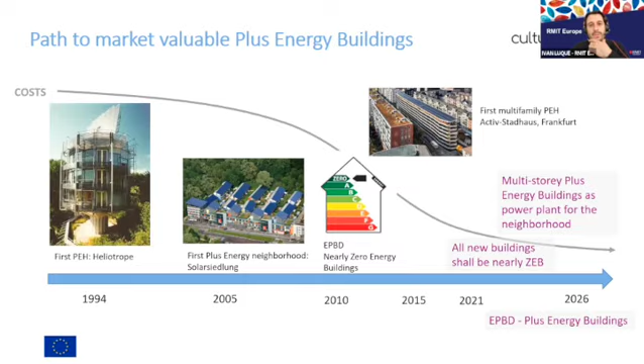So starting with the first slides on the definition of the positive energy building from the perspective of Cultural-E. These three aspects are key for us. One is the reduction of the greenhouse gas emissions in the system surrounding the building, but also incorporating neighborhood and district scale, as the positive energy building intends to support the flexibility concept by reducing the stress in the energy grid and allowing the exchange between the different buildings. All this may help the transition to a zero energy state and a cost-efficient approach.

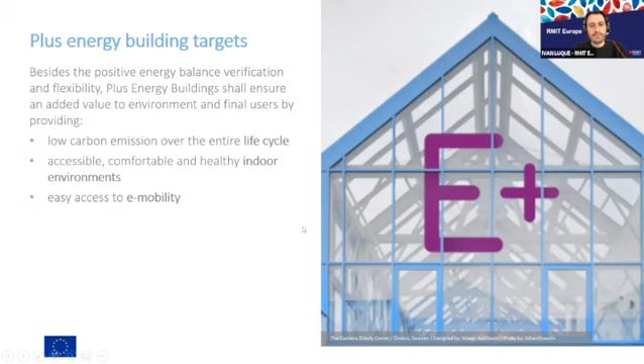As well, plus energy building targets focus on the life cycle, the indoor environment, and e-mobility, meaning that we aim to reach low carbon emissions, to make the indoor environment accessible, comfortable, and healthy, and allow the building features to incorporate easy access to e-mobility.

The overall objective of the project is to define viable and testable technology concepts and business cases for positive energy buildings by accounting for a climate and cultural approach that encompasses the overall building configurations, technology, and user and system interaction. Cultural-E is developing a set of solutions that will be comprehensive and easily replicable, thanks to reliable methods and practical guidelines that are going to be developed during the project, thanks to the demonstrations in the 4 climates.

As key expected impacts that the project will bring after the 5 years of implementation, we expect to support the nearly zero energy building concept and go forward from this by taking into account cost efficiency and keeping similar costs in comparison to nearly zero energy buildings, as well as to contribute to the reduction of CO2 emissions in the residential sector by 2050, by 80% compared to the levels in 1990.

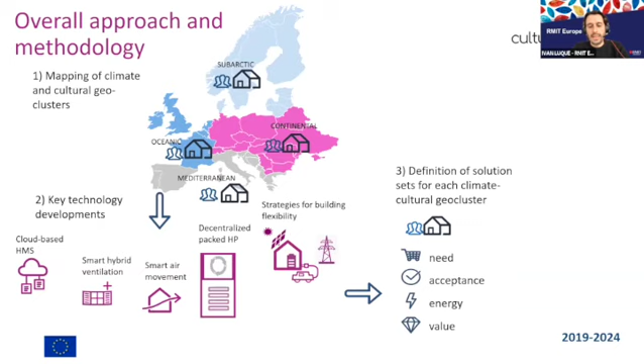And the definition of the solution sets for each geocluster will be led thanks to the mapping exercises and the technology developments that will be incorporated into the 4 demo cases in the 4 climates. In the next slide, I will go deeper on these 4 demos, with the final scope of decarbonizing the European building stock and increasing the share of plus energy houses.

which is slightly similar to the Italian one in that it will be a multi-storey building with only residential uses expected. The difference between these 2 is that the first one is dedicated to social housing, and the second one is in the free market. Then the cluster of users will be different in each one.

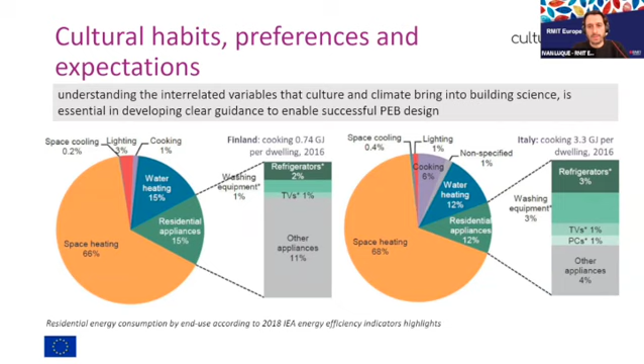For instance, cooking is quite significant. The difference is from 1% to 6%, but others also show minor changes that need to be accounted for, as the energy produced is limited, and this limitation needs to be transferred to the practices that users do in their daily life.

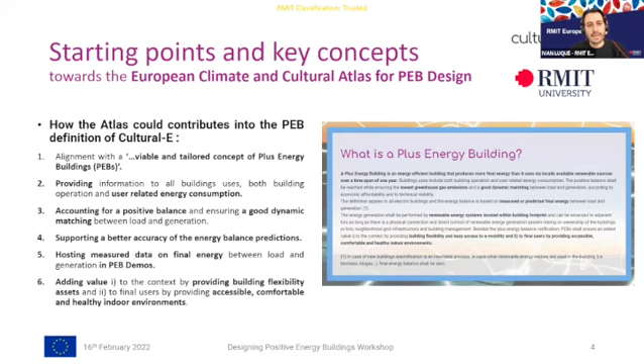In addition, it will provide value to users by providing an accessible, comfortable, and healthy indoor environmental concept for being incorporated into the design.

Initially, the Atlas was based on the first studies we ran in the project, focused on social sciences, and we delivered the first deliverables into the work package related to cultural and climate variables referring to these approaches, which has driven the current configuration of the Atlas.

But this has been complemented with further investigations developed in the first 2 years of the project, and now we can pose the following two questions that somehow give an answer to the conflicts that have arisen between the different approaches.

How to tackle user energy demand by integrating its complexity into PEB design? We know that user behavior predictions and simulation-aided building design could conflict with the energy demand concept from a social sciences perspective, because the consciousness of users and individual behavior is driven by socio-cultural factors that potentially will not be captured from the data monitor and time use schedules used for predictions.

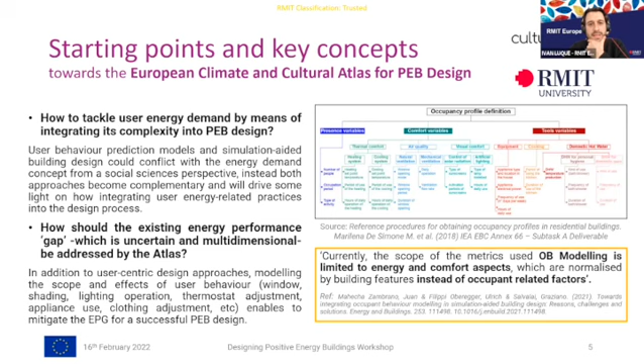Instead, both approaches become complementary and may shed light on the integration of user and energy related practices into design, aiming to transfer the sociocultural and climatic factors that directly affect building energy performance into the Atlas. Specific layers have been designed, and I'm just mentioning here the last 3 developments.

These refer to the energy cultures drivers that describe users' energy practices, intensity and consumption value variables, as well as technology selection and so on, in order to tackle the social sciences approaches.

This is complemented with occupant behavior models that bring and source a huge number of publications and scientific papers referring to modeling occupant behavior for different actions and presence scope. It's also complemented through the indoor environmental quality aspect layer group, which brings operative temperature estimations for the different climates, that Lorenza is going to be presenting later on.

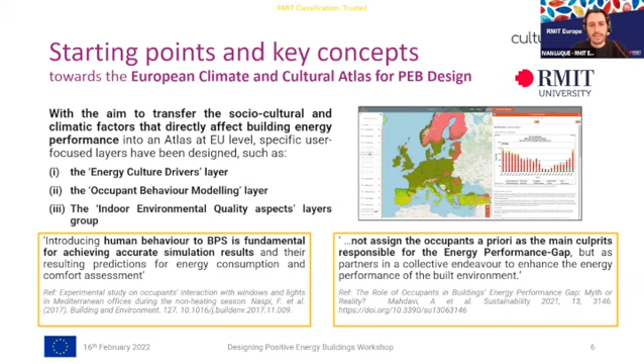And this is the approach that we are trying to pursue in Cultural-E. So, passing through the main features and the main concepts that define the Atlas.

We intend that the Atlas is perceived as a comprehensive set of information sources which add questions and provide key inputs into building designers' daily practices. It's backed up by a GIS online interface that makes available the results from the Cultural-E project and other external sources that complement and support the process.

This is divided into two main groups of layers. The first one is statistical data referring to energy, socioeconomic, climatic, and environmental aspects, most of them provided in a numerical format.

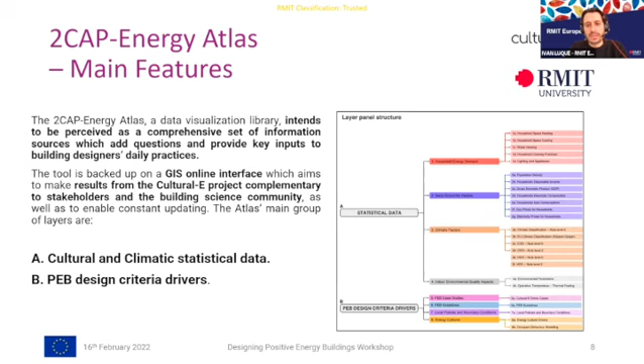And the PEB design criteria drivers group, group the different layers that have a more text and conceptual approach together with graphics. So we bring PEB case studies, guidelines, also local policies and boundary conditions, and the energy culture group.

This is the kind of information that can be reached and is sourced throughout the energy cultures layer group, where we have schedules and charts regarding windows opening, the distribution of user activities in different journeys and locations, different attitudes of users regarding lighting, shading, or clothing, as well as the thermal preferences for operative temperatures and interaction with thermostats and so on.

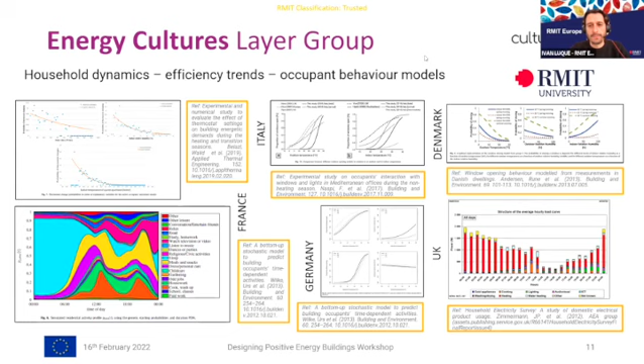So now we are going to explore the atlas. This is going to be just a few minutes before I give room to Juan for his presentation. So we have, up to now, 8 different groups of layers.

The first one refers to household energy demand, which provides information for different uses: space heating, space cooling, water heating, cooking and lighting, and appliances, distributed at national level and NUTS 2, and the sort of information that is provided allows... just one second, let me turn this on.

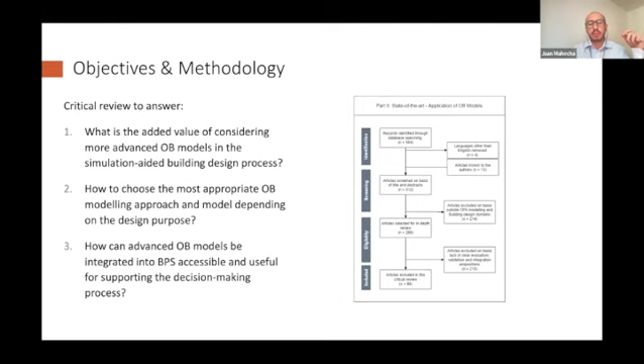Because of this, we reviewed the literature asking: what is the added value of considering more advanced occupant behavior models? How can I choose the appropriate occupant behavior modeling approach, and how can this be integrated?

So let's start talking a little bit about the occupant behavior research field that goes around the human building interaction research loop, where we have a first stage of investigation. Here we are using data collection and monitoring campaigns to gather information about the occupants, their features, characteristics, and how they interact with the building.

So here we advance also in sensing technologies, privacy and ethics issues. And then with this information, we move to another stage, understanding, when we actually implement analytical and modeling methods in order to understand the occupant behavior—which are the drivers motivating the occupant behavior, and which are the differences of these drivers in different contexts.

Then we understand also that occupant behavior is influenced not only by environmental and time-related issues, but also contextual, physiological, psychological, social, cultural factors. So it's a really complex phenomenon with so many things behind it.

And then we can classify occupant behavior into presence, when the people are or are not in the building, adaptive behavior that is intended to adapt the indoor environment—for example, I'm feeling hot, then I open a window—or non-adaptive behaviors that are more related to the kind of activities that users are performing in a building.

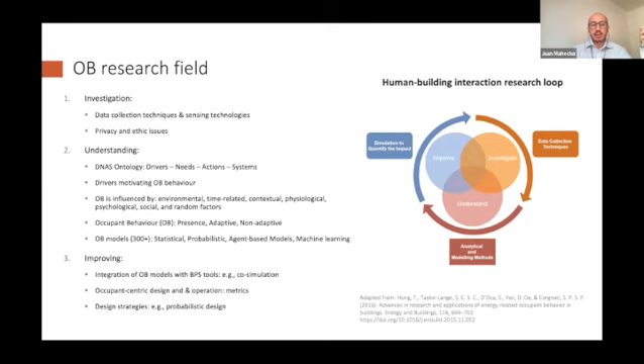For example, watching television. And nowadays we have more than 300 models published in the literature, from statistical, probabilistic, to agent-based models. With these models, we can start improving our building performance simulations, integrating the models with tools such as co-simulation, implementing occupant-centric design and operation, and implementing different design strategies such as probabilistic design.

Then one of the first milestones of our paper is: let's map what is the research roadmap between the occupant behavior research field and the actual users of building performance simulations and these models.

Because nowadays these models are mainly used by researchers and the developers of the models, but the practitioners and people actually trying to apply the models into building performance simulation is quite limited.

So we identify a first fundamental knowledge area where we are advancing a lot, but we still need more standardized protocols and guidelines for conducting and documenting monitoring campaigns, for developing and documenting models, better validation procedures, and on the simulation front, occupant-centric metrics, exploring different design methodologies, and demonstrating this in real scenarios.

Then with this, we can move to an integrated knowledge, where if we have all these aspects clear, then we can understand better the scalability and transferability of occupant behavior models from one context to another, guidelines for model selection, and the different hierarchy of actions of the different models in a simulation scenario. And then we would need supporting tools, like building performance simulation software that integrates the occupant behavior models.

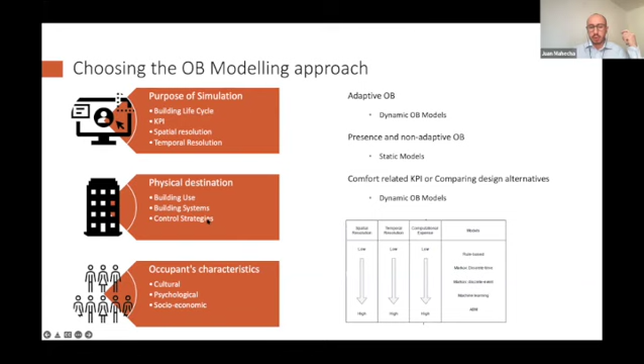If you are assessing the annual energy consumption, then maybe you don't need a high complexity model, but you can keep to a low complexity model. The same with the physical destination, so which is the building use, what are the building systems and the control strategies? If it's a passively ventilated building or has an active HVAC system, all these things are going to affect the choice of the occupant behavior model and the modeling approach.

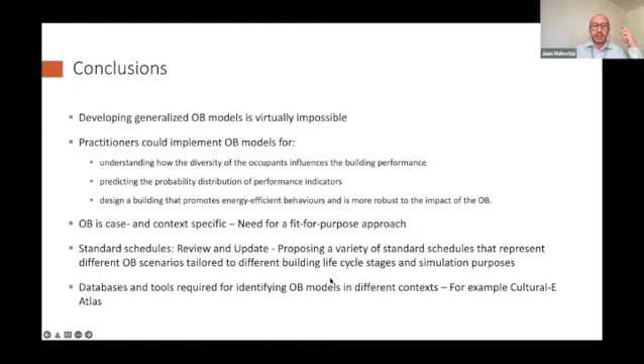So some main conclusions: developing a generalized occupant behavior model is virtually impossible. This is because of the complexity of the occupant behavior. Then practitioners could implement occupant behavior models for understanding the diversity of the occupants, how they influence the building performance, assessing different design alternatives. Then we need a fit for purpose approach in order to choose this depending on the case that you are handling. And well, we need databases and tools for identifying occupant behavior models in different contexts. And because of this, it becomes highly relevant, for example, the atlas, the Cultural-E Atlas recently presented.

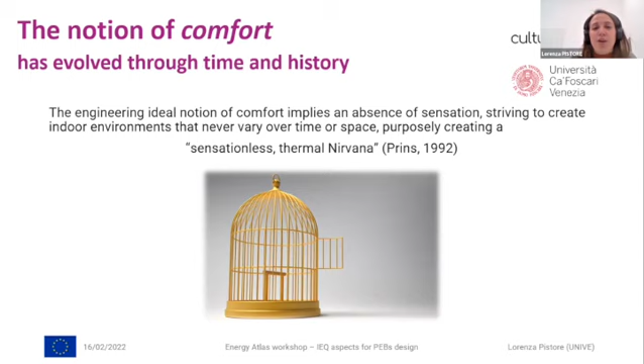We strive to create this indoor environment that never should vary over time or over space. And as Prins said, we try to create this sensationless thermal nirvana. So we usually target in the design, but also I would say in the standards, very tight and static environments where transition and stimuli are not admitted.

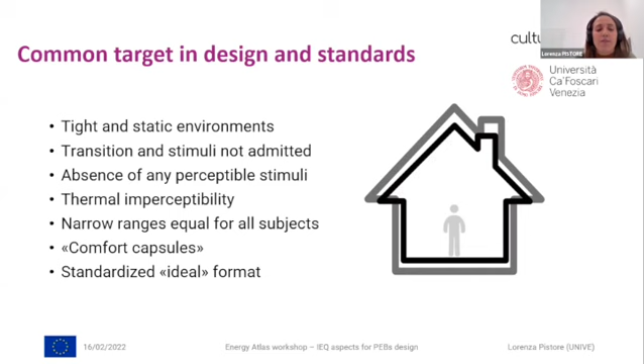We want an absence of perceptible stimuli, kind of imperceptibility of the thermal environment. The standard requires very narrow ranges, equal for all the subjects. So we try to create what in literature are called comfort capsules with this standardized, very ideal format of the indoor environment. But what we are asking in our project is: is this ideal format really ideal for the users?

Actually, if we look at literature, we can see that there is no actual increment in the satisfaction of the building occupants. And moreover, it takes more energy to maintain a very narrow indoor temperature range than a broader range. Moreover, people living in higher indoor environmental quality spaces become kind of, let me say, fussy to the thermal environment. They always have increasingly higher expectations.

And the problem with expectations is that they do not have symmetric dynamics. So it's very easy to lift the indoor environmental quality expectations of the user, but it's very difficult then to go back. And this is because we develop a kind of excessive need for comfort, an excessive need for systems and technologies. And it is also due to what in economics is called the endowment effect. Basically, once we have something, we don't want to go back.

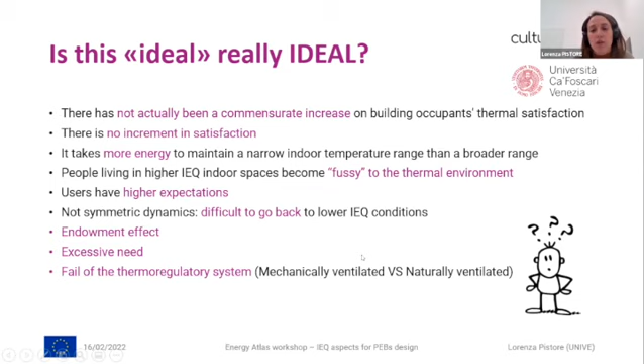And the worst part of it is that also our thermoregulatory system starts to fail in the adaptation. And there are a lot of works focusing on occupants comparing mechanically ventilated versus naturally ventilated buildings. So here I've just tried to sum up a little bit what happens. So basically we have a user with his own sensation and perception, striving to achieve comfort. So his key driver is achieving comfort.

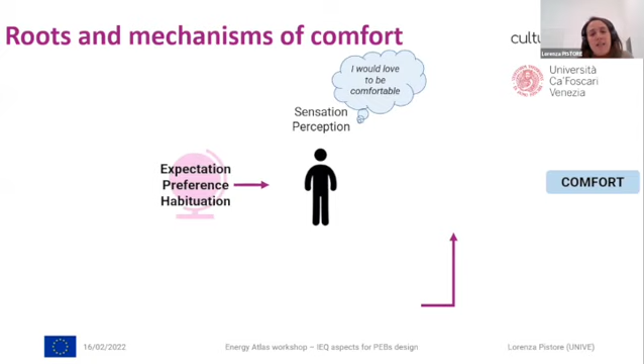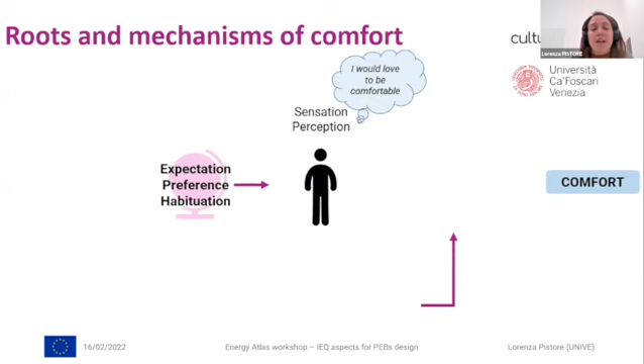But of course, the sensation and the perception of the user, as Juan was already mentioning, is affected by a lot of aspects. It is affected by his own expectation, his own preference, and his own habituation. But expectation is a very complex sum of different factors, which we could call diversity driving factors. For example, climatic long-term history of a user, cultural and social history and dynamics, demographical, historical and contextual factors, but also educational, and of course, ethnical and physical factors.

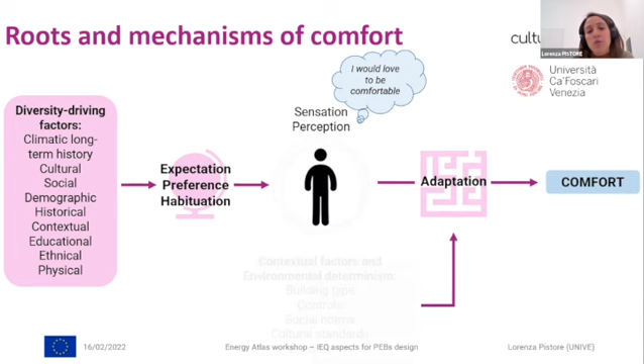In order to achieve the comfort, the user adapts. But adaptation in the indoor environment is not only a matter of the actions of the user, but again, the user is affected by contextual factors or what we could call environmental determinism. So first of all, the building typology. Let's think, for example, that we are at home and we can adapt ourselves as we like because we are in our home. But if we are at the office, we need to take into account that there are other people, everyone with his own sensation.

It depends on the controls that we can have within the environment. On the social norms: again, at home, we can stay with a t-shirt and shorts, but in the office, maybe we need to wear a suit, and so it's more difficult to adapt to the thermal environment. But also cultural standards and of course, economical conditions. So it's clear that comfort expectations and user attitudes are not a matter only of an engineering ideal of indoor environment, but account for a lot of different disciplines and sciences.

So in our project, we would like to state that the plus of the building should not just be an energy plus, but it shall be also a plus for indoor environmental quality conditions. So we needed to shift the paradigm into design, accounting for diversities in users' expectations and users' well-being. From literature, we have some hints to do so. We can try to reintegrate these external stimuli with more dynamic environments. We can readmit the air motion within the buildings and thermal gradients.

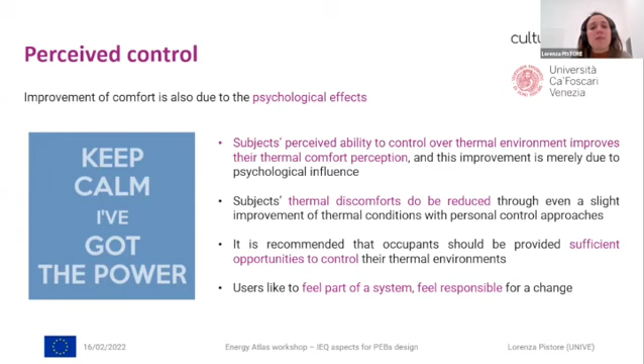And this improvement is merely due to a psychological effect. So the thermal discomfort of subjects can be reduced even through a slight improvement of thermal conditions with personal control approaches. To do so, it is recommended that occupants are provided with sufficient opportunities to control, even because they like to feel part of a system and not just be subjected to the building.

So in Cultural E, we are attempting to address diversities in the user's preferences. As we know, unfortunately, standards usually give us for the indoor environmental quality just an equal value for all the users in all the climatic and geographical areas. But in Cultural E, we're asking ourselves, could there maybe be different values for different users across Europe?

So the Smart Controls and Thermal Comfort Database is a database developed at the end of the 90s for a huge project led by Nicol and Humphreys for the development of the adaptive algorithm. So we looked at the responses of the users in these databases according to the thermal environment in 5 different countries: France, Greece, Portugal, Sweden, and UK. So we are addressing at the moment 3 climatic areas: the Mediterranean, the Oceanic, and the Subarctic.

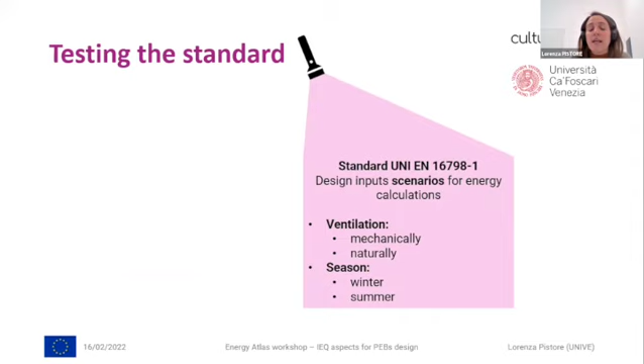So what we're basically doing is testing the standard. So we have taken some scenarios from the standard EN 16798 part 1. Maybe you know this standard because it gives us the design inputs for energy calculations according to different ventilation modes, so mechanically versus naturally ventilated buildings, and different seasons, so winter versus summer season.

So the first question we have asked is, which is the thermal feeling of a user in a specific country according to the operative temperature design inputs that are given by the standard. So for example, let's look at this scenario given by the standard. We are in summer in mechanically ventilated buildings. We have some prescriptions for the metabolic activity of the user, for the clothing level of the user, relative humidity, and air velocity. Maybe you are familiar with these values if you are, for example, performing simulation.

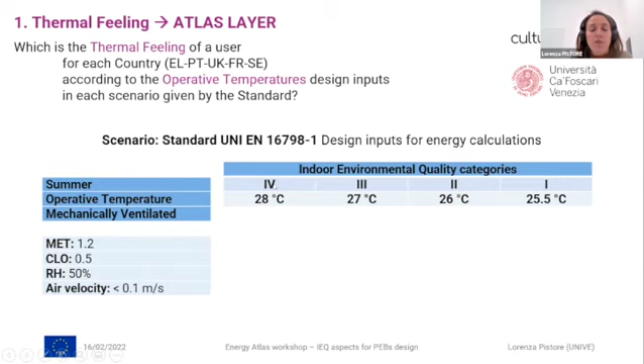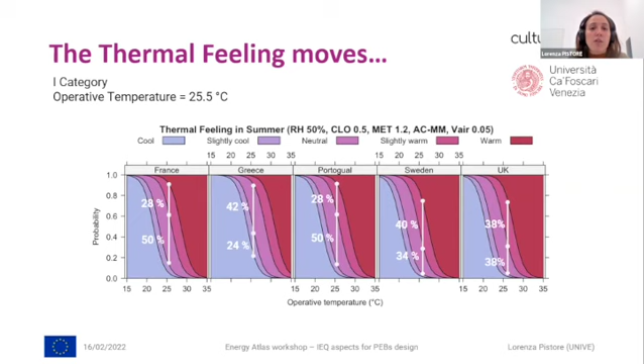So we have seen the thermal feeling probability. So now at this point for us, the question was, which is the operative temperature value that maximizes the "I'm feeling neutral" vote for a user in each country for the scenarios given by the standards, and how this ranges from "I'm feeling slightly cool" to "I'm feeling slightly warm".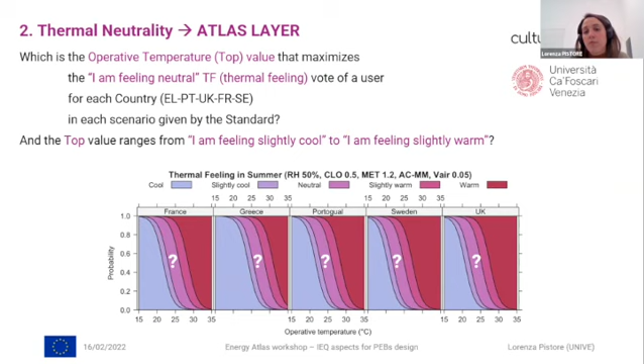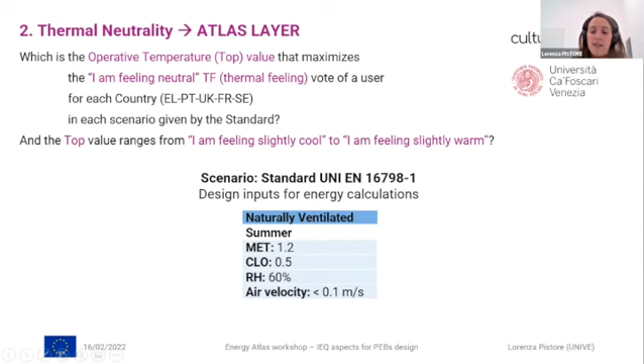So let's look at this other scenario given by the standard. Here we are in naturally ventilated buildings, again in summer. And we can see, for example, that if we look at the operative temperature for the thermal neutrality of the user, it's interesting to see how in Greece this value is up to 27.6 degrees Celsius, but in Sweden we have almost 4 degrees lower, so 23.9 degrees Celsius.

So also here it's very easy to spot some differences, and we have the differences also in the thermal range. So we can arrive up to 30 degrees Celsius for a Greek user to feel slightly warm. But in Sweden, this value stops at 26.7 degrees Celsius. But it is important to highlight, and we can see this a lot in some literature works, that thermal neutrality actually does not necessarily mean the thermal preference.

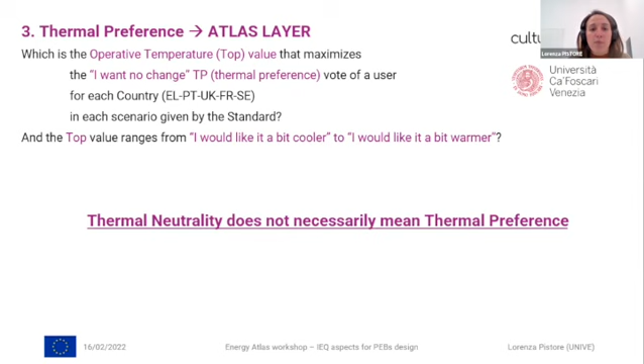So after having spotted the thermal neutrality of a user, we wanted to see which was the operative temperature value that maximizes the vote "I want no change" in the thermal environment. We took the same scenario to make a comparison, and we can see that, for example, a Greek user would like to have no change at 25.2 degrees Celsius. A Swedish user would like no change at 23 degrees Celsius, and in the middle, for example, we have France with 24.4, we have Portugal and UK, which is very close to Sweden.

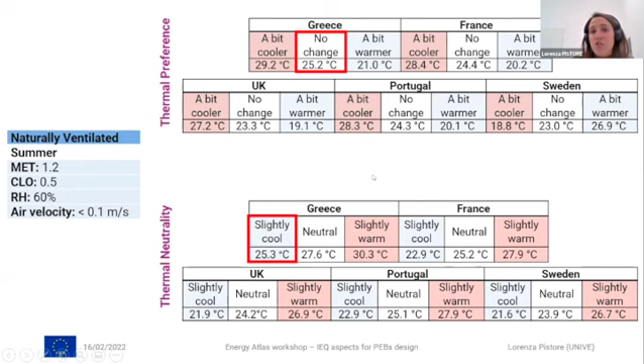And it's interesting to compare the values of thermal preference with the values of thermal neutrality, because we can see that they're actually different. So for example, a Greek user would like to have no change at 25.2 degrees Celsius, but it is also the value at which a Greek user would feel slightly cool. So from this analysis, we could say that in summer, in a naturally ventilated building, a Greek user would like to feel slightly cool, and he doesn't want any change in the thermal environment.

So I'm sorry if I've run a little bit for reasons of time. These are some first results that we are gathering from our analysis. I just want to stress that these presented results are the outcome of a first preliminary analysis with this SCAT database. And so the generalizations that we are making are based on this specific sample of observations. And we are trying to propose this new approach in order to account for diversities. So contrarily to the standard that just gives us a unique value for all the climatic areas in Europe, we would like to provide different values across Europe.

But of course, these results need to be validated with other databases and integrated also with our post-occupancy evaluation campaigns. And in the future, of course, you will find them mapped into the atlas, as we will see later after the break. But I would also like to invite you to keep in touch with the project because they will be also included in our deliverable. So that's all for now from my side. And after the break, we will sneak into the 2CAP Energy Atlas to see what we can find and what we will find in the future.

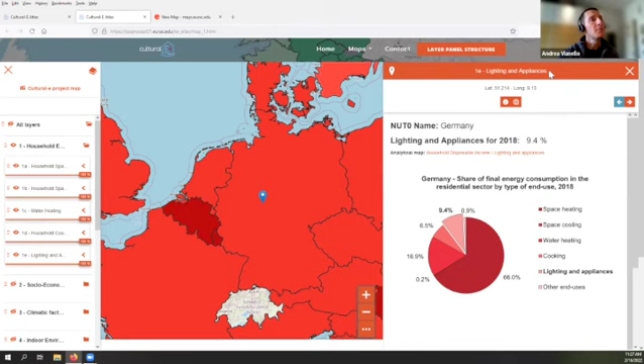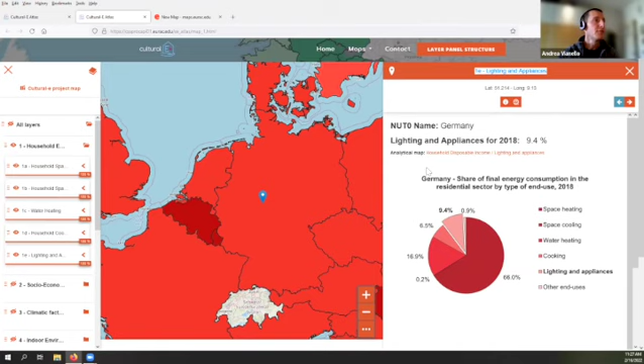layer, that are 1, 2, 3, 4, 5 layers. So when you click, you get the information about all these 5 layers. But have a look here at the title of the layer that you are watching. So here you get information for Germany, for lighting and appliances. And if you use this arrow, you can move to the other layers that are switched on. So here you have household cooking practice, here water heating, and here household space cooling, and so on.

Pay attention that if you highlight one layer, even if there are others that are on, when you click, you will get information only for that specific layer. So this may help you get information about your layer, but may give you some confusion. So just pay attention if you highlight some layers. Okay. So now if you want to see other layers, you can easily click here in the group layer. You can switch off everything.

If you scroll down, for example, we can move to the layer that Ivan presented here, zoom a bit out, and here you get the information of the layer. So what happens when you click on a specific country? You get all the publications that are in this region, in the area where you click. So here now we have all the information for Germany. You can scroll down and you see the publications for the specific country.

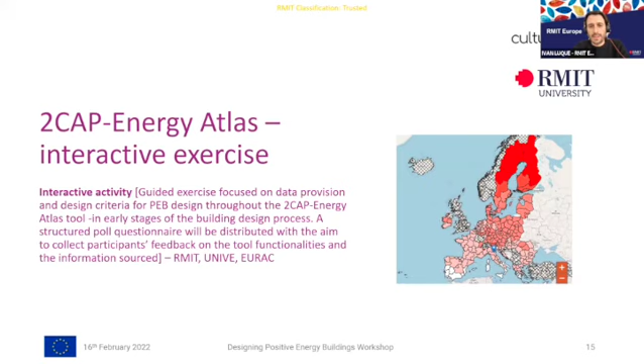As described in the agenda, we have prepared some questions that we are going to post in a specific dedicated poll for collecting your feedback, and we are going to run 2 exercises. One is related to the last layer that has been commented on by Andrea, the occupant behavior modeling layer.

But first, I'm going to ask you to locate a theoretical location for a building project where you will be focusing your exploration, and do in the next few minutes some testing on the different layers that are available for checking the insights and the information that is provided.

Then after this, my proposal is to go to the last layer of the atlas and to check all the available OB models that are sourced into this layer. And if you would like to make a more accurate search, you can use the last tool feature that Andrea was describing, and try to identify by the attribute corresponding to occupant action and presence the different uses that can be analyzed or are analyzed under the literature review, and then try to figure out if the information that is sourced could be useful for your practices.

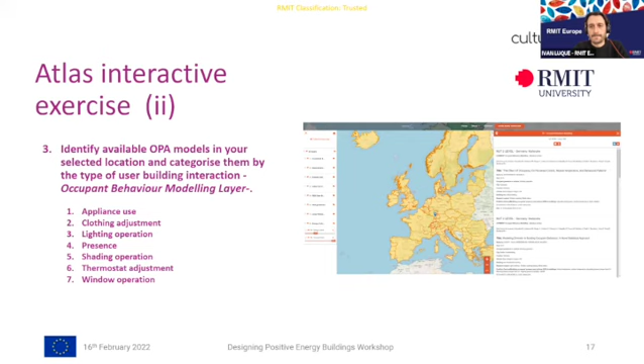Did you have any troubles exploring the atlas? Did you check it before the beginning of the workshop?

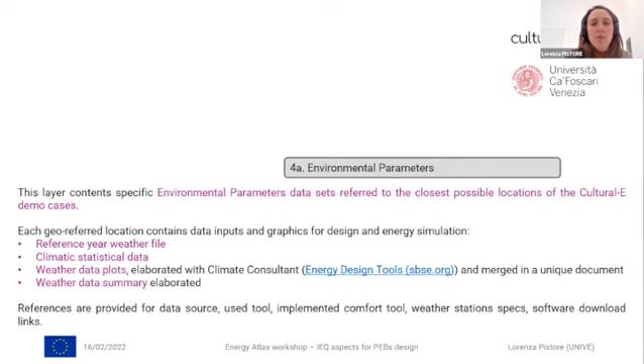Then there is a layer about thermal feeling, and in the future we will have layers about thermal neutrality, thermal preferences, and post-occupancy evaluations. In these layers you will find a prediction of the occupants' thermal feeling, neutrality, and preferences in different specific climatic areas, according to 4 scenarios recommended in standard EN 16798. These are preliminary statistical analyses that will be integrated over time.

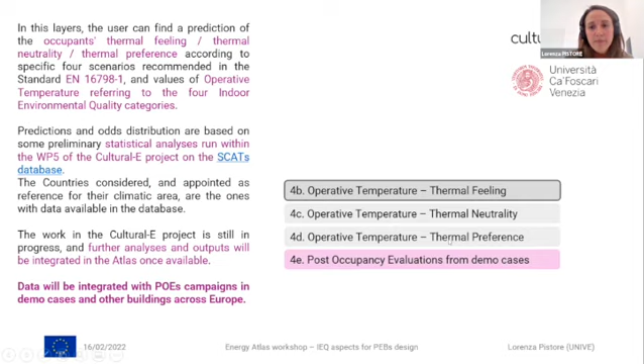Moving quickly into the atlas, as Andrea has shown, there are multiple layers. We are number 4, the environmental quality aspects. If you open this group, you find the environmental parameters and the thermal feeling according to operative temperature. Looking at this one, you can see the locations of our 4 demo cases. Let's open one to sneak into it - you can find available for download all the files I mentioned before.

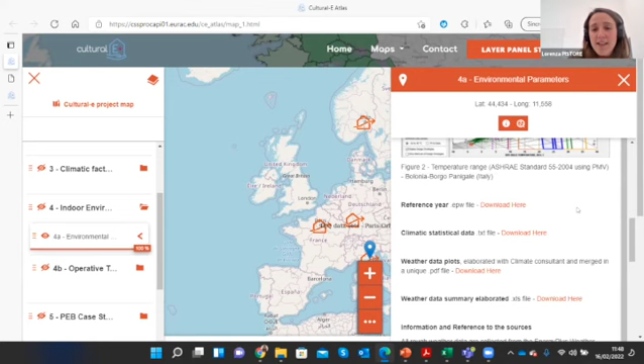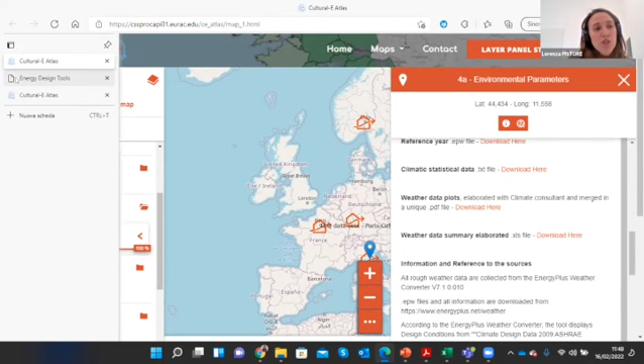As I said, they've been elaborated with other tools and we gather data from other sources - for example, this reference file from EnergyPlus, which you're probably already familiar with. All the references are stated below. What's interesting is this file with weather data plots, elaborated with Climate Consultant, a tool. If you're not already familiar with it, I really suggest taking a look. It's a tool provided by UCLA, and it helps you analyze the climatic data of your location and the indoor environmental quality conditions of your building in order to target the building design.

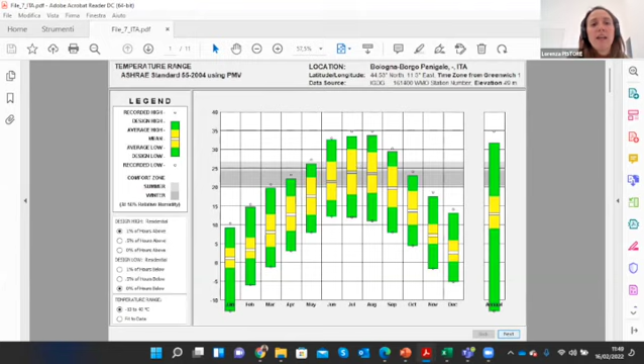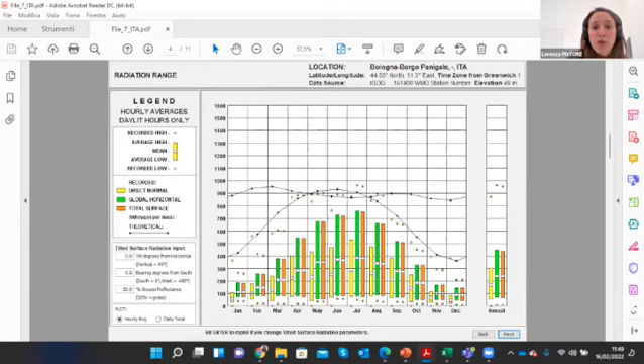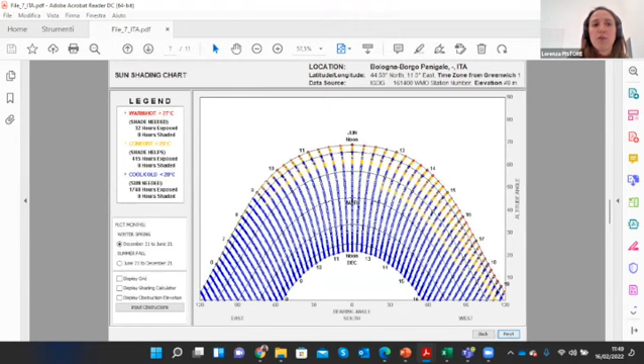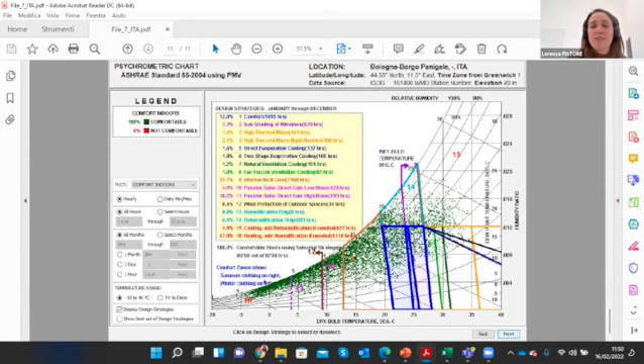This is an example of what you can find, all included in the atlas for easiness - you can just download the file. You have plots of weather and climatic data, like the temperature range during the year, monthly averages, radiation range, and sky cover range for that location. There are also interesting sun shading charts you can use to correctly design shadings in the building to target user comfort, plus wind velocity data. A very interesting feature is the psychrometric chart, which gives design strategies - mostly passive design strategies - to achieve comfortable conditions. It's worth having a look at it.

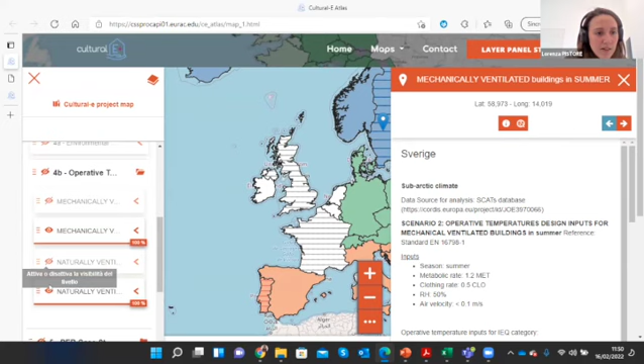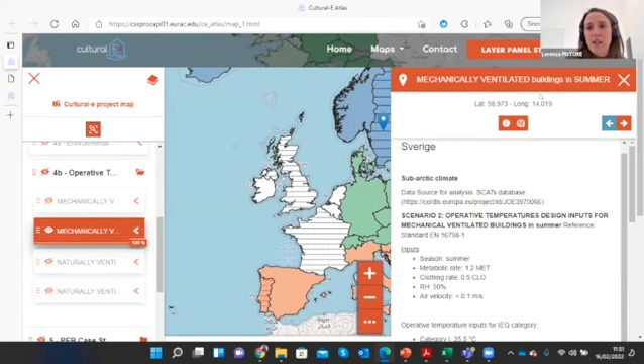That was one of the layers. In the second group, the thermal feeling, you can see the 4 different scenarios given by the standard, as Andrea was showing. If we click on this one, taking a reference country - for example, this one with stripes - you can find what I showed before about the different scenarios. This one is mechanically ventilated buildings in summer, showing inputs taken from the standards, the recommended operative temperature, and the results I showed earlier.

So this is what we have up to now. As I said, the configuration is in progress, so there will be a lot of integration in the further period, which we hope can help better target your simulations and building design according to the different preferences of users in different climatic areas. So this is basically the aim.

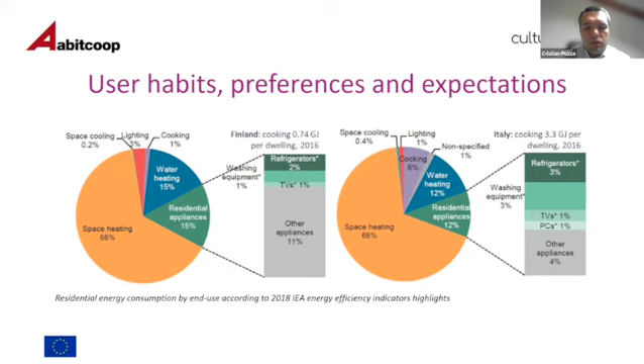We need to consider that, because in this type of buildings, the share of energy spent for heating and cooling is not so high compared to the plug loads, for example, the energy for the user. And this means that if we target the positive energy balance, we need to weight also the user and to consider what the user is willing to do. So Abitcoop focuses on indoor environmental quality, the building value, climatic resilience, and also environmental impact, but also the positive energy balance and life cycle costs that are the main target for this project.

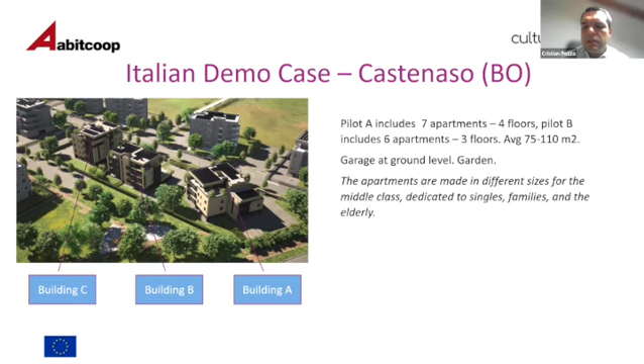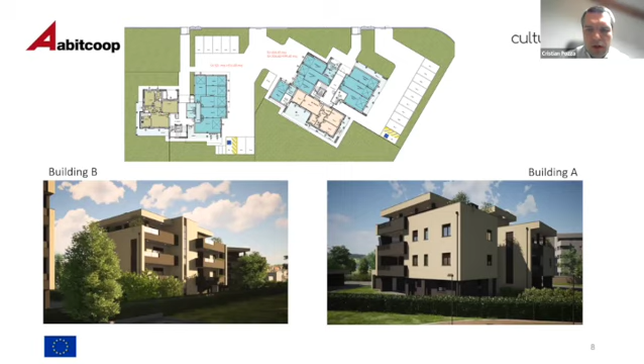The demo includes 2 pilot buildings. Building A has 7 apartments and 4 floors. Pilot B has 6 apartments and 3 floors. The average size of the apartments ranges from 75 to 110 square meters. There are garages at ground level, a common garden, and the target is the mid-class, so singles, families, and elderly people. Here I show you some renders so that the shape is more clear.

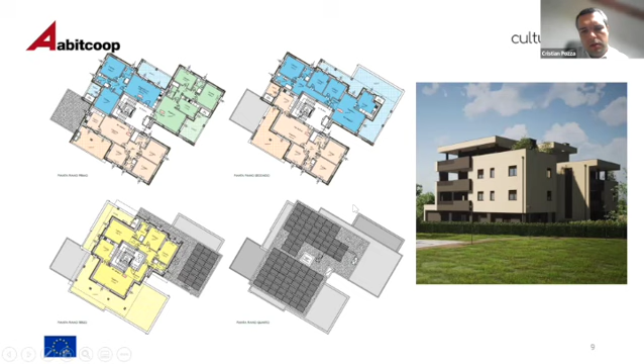Of course, they put photovoltaic over the two different roofs on 2 different levels, and also the shape, the area of the roof was defined already at the early stage, and we will see later. It was important to check to which extent they could reduce the energy consumption, and therefore if the roof was large enough to host the photovoltaic system.

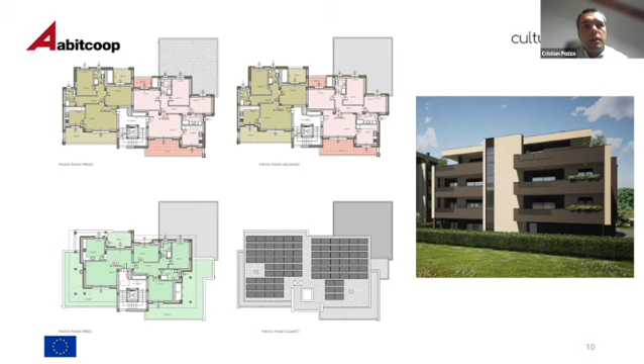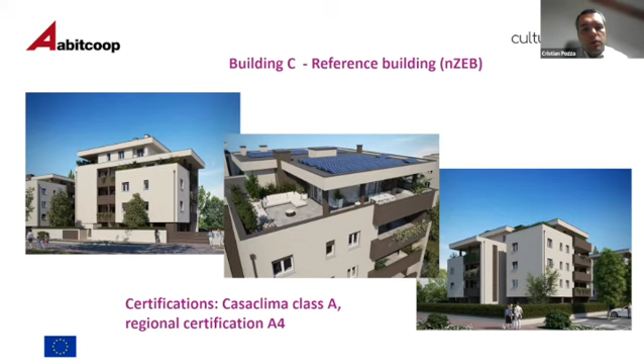There is also a reference building, which is an NZEB building, certified by CasaClima Class A, which is used in the project for reference. So the costs and the energy performance and also the user behavior we will monitor also in these 3 buildings to check what is the difference from NZEB to PEB building.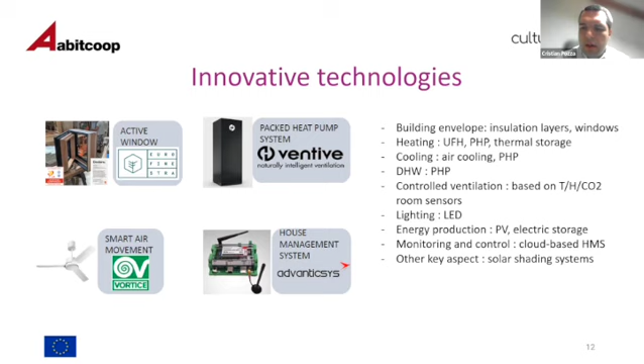There are some challenges. Basically, the heating and cooling capacity is limited, and on the other side, the units are highly performing. But from the design, it is clear that they need to avoid peaks in the demand, and it is a good approach to overlap the air movement and the cooling, depending on the temperature of the rooms.

There is a need for advanced control logics to be adopted there, and taking into account the user occupancy, the behavior, the preferences, and the energy flexibility is a good opportunity, as here there are electric and thermal storages to be managed.

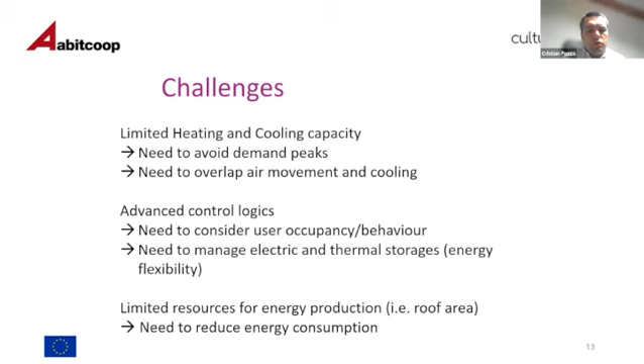And then an important aspect is that the resources are limited. In particular, the roof area is anyway limited. So it is important to know from the beginning of the design how to reduce the energy consumption properly. About the timeline, we are now starting the building process, and dwellings will be delivered in the first quarter of 2023. And then there will be a monitoring phase to check that everything was done correctly.

Here I put this slide to mention that there are a lot of tools that have been used and can be used to support the design process. To get to the preliminary design, for example, it was important to understand the feasibility and the cost, more or less, for the photovoltaic system on the roof, and then to get to the final design, an optimization of the photovoltaic, also including the sizing of the batteries, was performed. So different levels of depth of information.

Dynamic thermal simulation was an important tool because it was important to understand the energy consumption for heating, and then to check if the cooling capacity was enough. There are, of course, mandatory compliance tools to be used. We will see later that not always with this new type of buildings these tools are providing correct numbers, so we need to consider this.

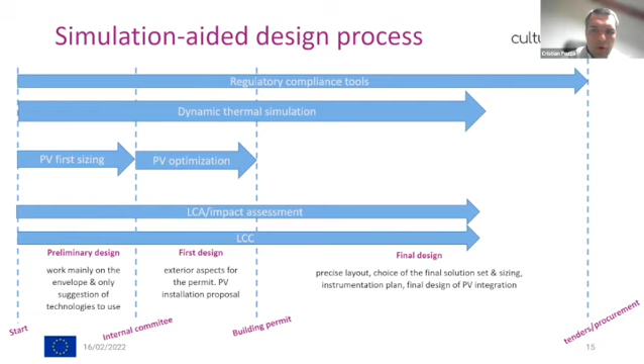And then, of course, the LCA, so the environmental impact, and the impact on cost, not only the investment, but also the operative costs should be considered. And finally, all these tools could be used to some extent from the beginning, across the design phases down to the final design, and now after the procurement, there will be the assessment by the monitoring.

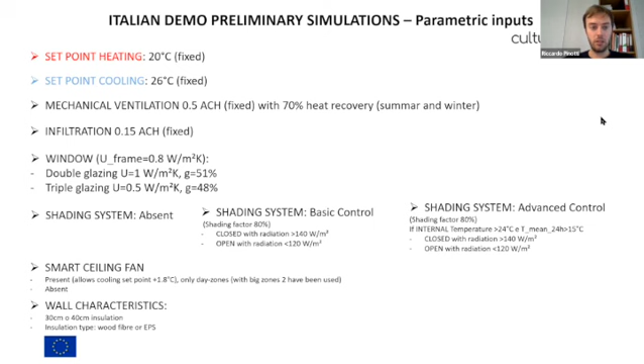On the axis, you see the heating and cooling demand, and you see the effect of the different technologies I mentioned before. For instance, the blue rectangular shapes are indicating the effect of having or not the shadings, and the effect of having a specific control on them. Then the effect of the smart ceiling fan.

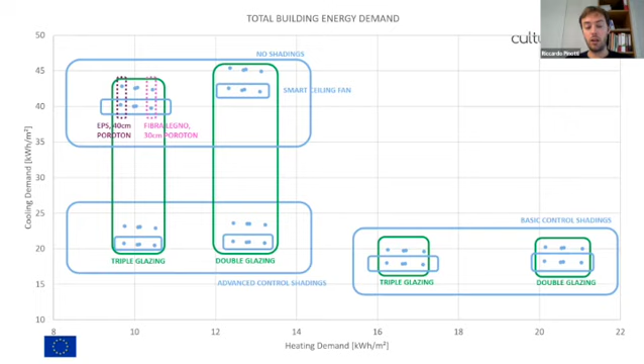So in this group of simulations, you see that the ones with slightly less cooling demand are those where the ceiling fan is used. And then the effect of the thickness and insulation typology, and also, as I said, the different types of glazings. So from all this picture of simulations, a focus was made on one of the most promising ones. And if you go to the next slide, that's where we focused our attention to reach the positive energy building target.

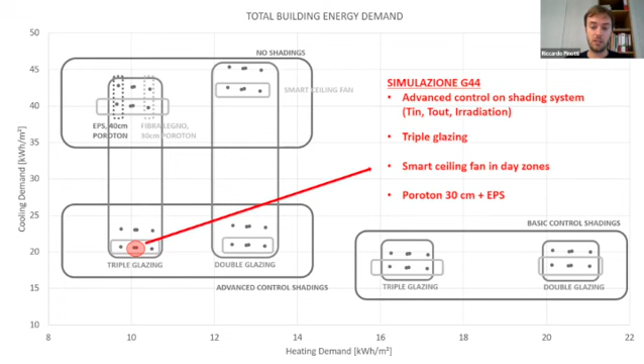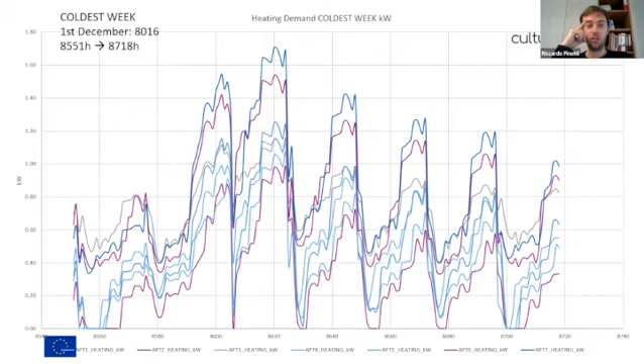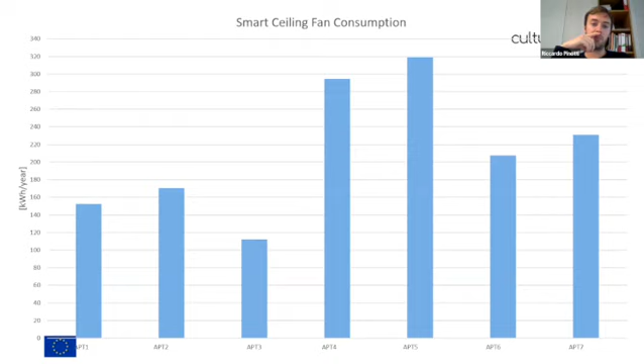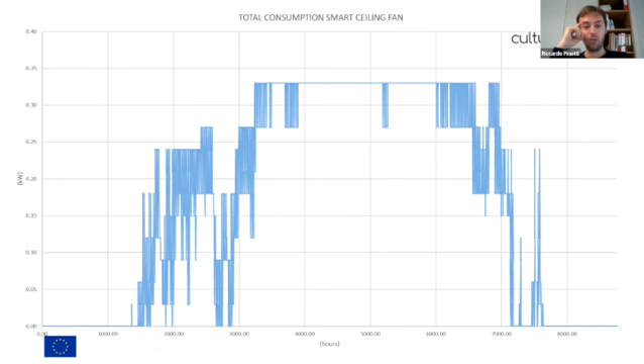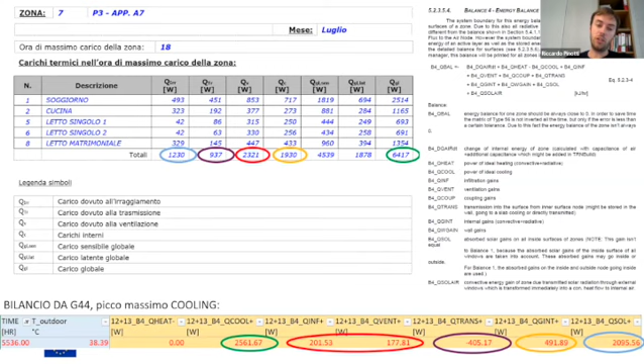This is quite interesting because I reported the comparison between the results from a steady state evaluation of the consumption of the building done using the Legge 10 regulation, and in the bottom part, the results from our dynamic analysis. If you compare the circles where the color is the same, you see huge differences. As an example, the first circle, the blue one, is the irradiation, and using a dynamic simulation, which exploits all the data at each time step of a weather file, the irradiation is almost doubled. So this kind of modeling helps having much more detailed results.

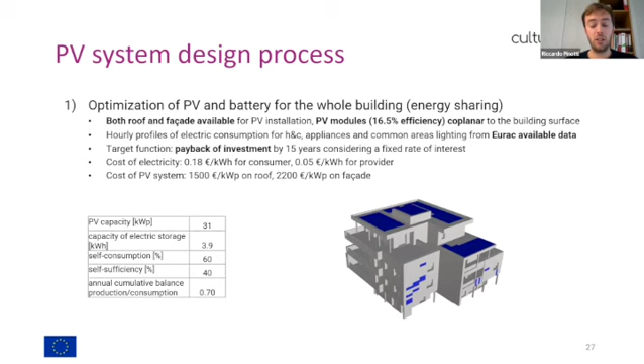Next one, please. Another very interesting work we have done was an optimization of the PV panel placement on the building, which is almost mandatory to reach the target. We performed simulations where we defined specific places to put the PV, for instance on the roof and on the facade. The optimization targeted reducing the payback time within the 15 years after the investment. Here we made some considerations accounting the production of PV to the whole building, and then in the next slides, instead of sharing the whole production to the whole building, we split it into different flats. So starting from the consumption curves for each flat, an optimization of the PV was done.

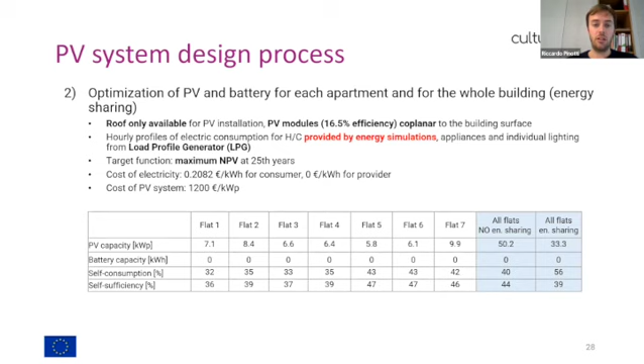And in the last slide I have, also considering the effects of having different sizes for the battery. So basically it was very quick. We didn't go through the results, but just to let you know the power of this kind of instrument and how this can be really coupled with the inputs from the Atlas we are developing. So that's it. Thank you.

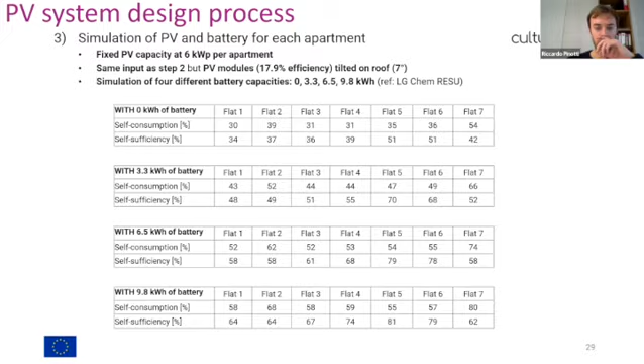Thank you very much, Riccardo and Cristian, for this complete overview of the process for the Italian demo. We will continue updating the further developments on simulation and how the Atlas is inputting on this process, potentially by the middle of 2022, when we will be carrying out the midterm conference of CULTURAL-E.